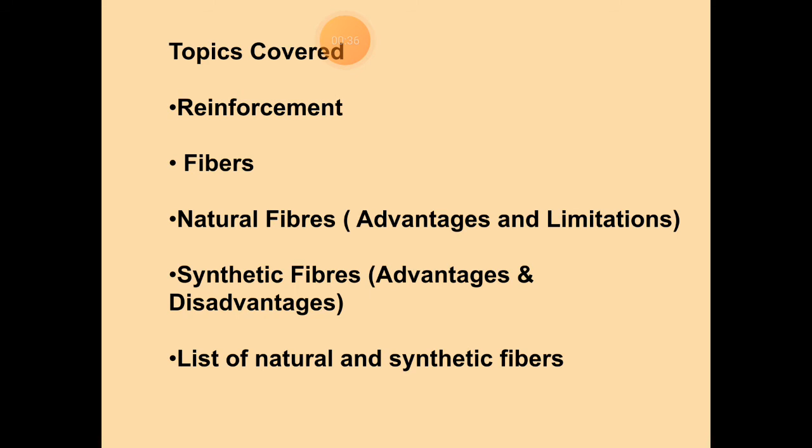Now turn to reinforcement. In materials science, reinforcement is a constituent of composite materials which increases the composite stiffness and tensile strength. Reinforcement materials usually add rigidity and greatly impede crack propagation. In particular, they enhance the mechanical properties of the matrix and in most cases are harder, stronger, stiffer than the matrix.

Reinforcing constituents in composites, as the word indicates, provide the strength that makes a composite what it is, but they also serve certain additional purposes of heat resistance or conduction, resistance to corrosion, and provide rigidity. Generally, reinforcement is used to withstand maximum load and serve the desirable properties. Reinforcement can be made to perform all or one of these functions as per the requirements.

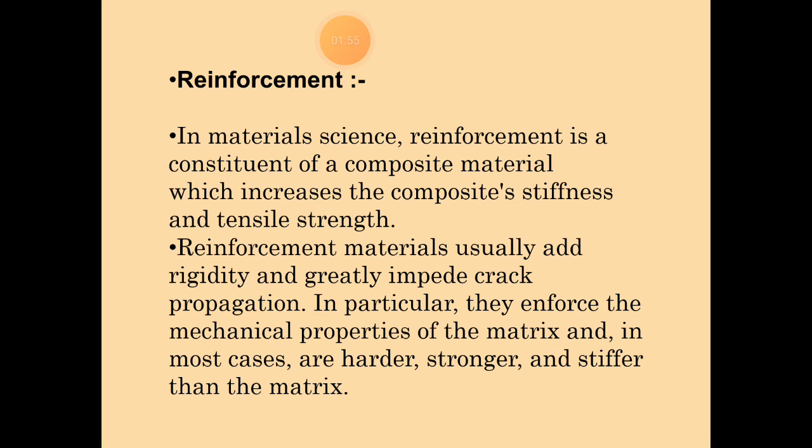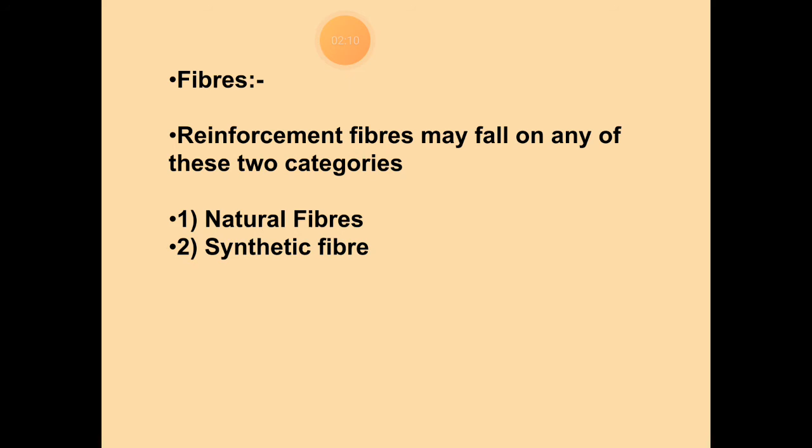Now, next is the fibers. Reinforcement fibers may be categorized into two types. One is the natural fibers, another is the synthetic fibers. Now, natural fibers. Natural fibers are the fibers that are obtained from plant, animal, or mineral sources. Some examples are cotton, silk, wool, etc.

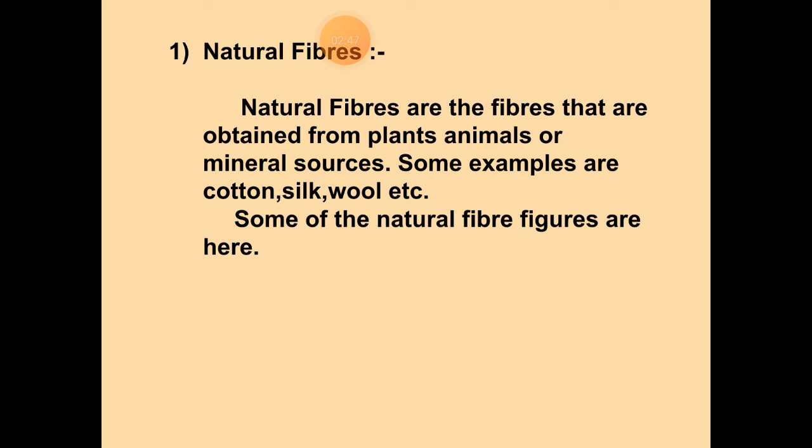Some of the natural fibers are shown here. In the natural fibers, various fibers like cotton, jute, plants are considered. See the figure. Figure shows luffa, palm, jute, banana, rice husk, kenaf, chicken feathers, cotton, coir, sisal, flax, abaca, hemp, and ramie.

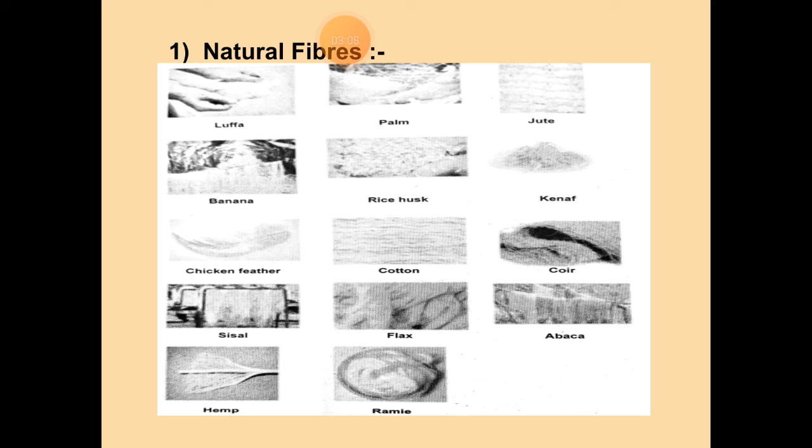Now turn to the various advantages of the natural fibers. They are renewable resources, with lower production cost. These fibers have low production cost compared to others. Then good specific mechanical properties, lower density of composites, reduced energy consumption during manufacturing, meaning saved energy. Then biodegradability, eco-friendly materials, lower risk to human health. These are the various advantages of the natural fiber.

Now, the limitations of the natural fibers are lower thermal resistance, then dimensional instability, restricted processing temperatures, inhomogeneous structures of the fibers, then negative consequences of water absorption, then susceptibility to microbial attack and rotting.

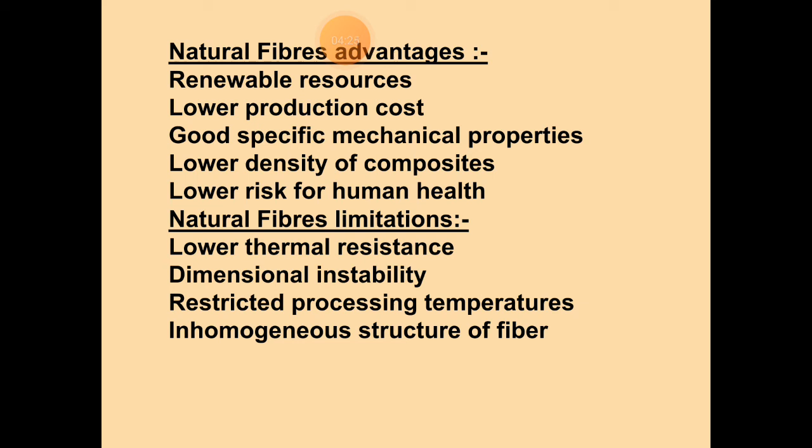Now turn to the second type, which is synthetic fibers. These fibers are man-made. Most of these are made from raw materials. If the raw material is petroleum, then they are called petrochemicals. They consist of small units, or a polymer made from many repeating units known as monomers. They include nylon, acrylics, polyethylene or polypropylene. Millions of tons of these fibers are produced all over the world each year.

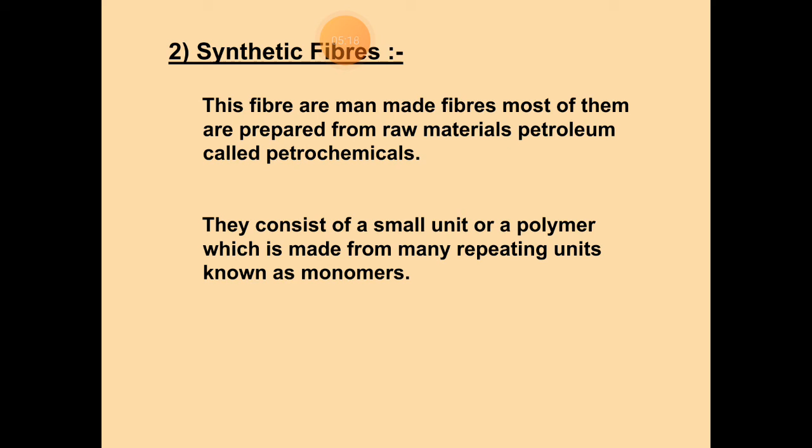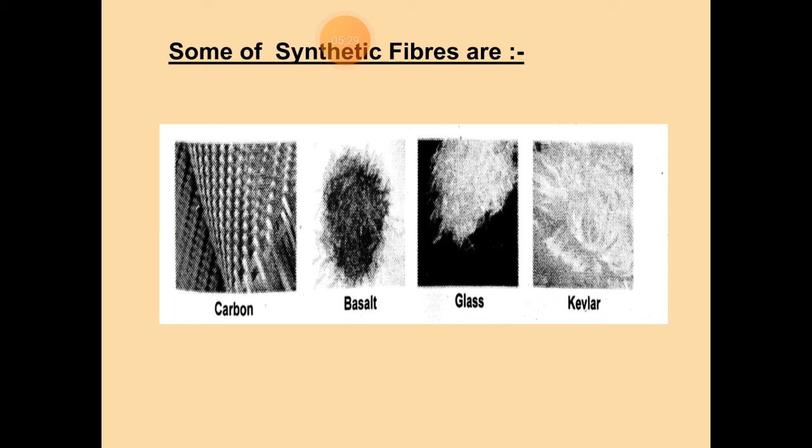Some synthetic fibers are shown in the figure. First one is carbon, second is basalt, glass, Kevlar. These are the various synthetic fiber figures. Advantages of these fibers: they are stretchable, waterproof, moisture resistant, non-biodegradable, long lasting, and readily pick up various dyes.

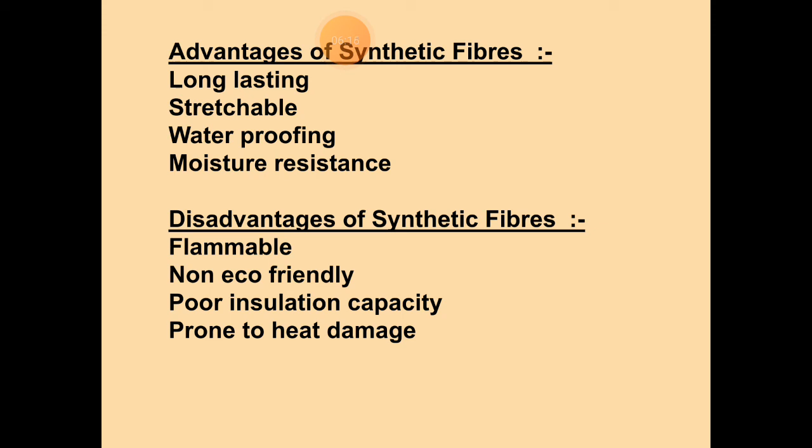Next are the disadvantages of the synthetic fibers. One is they are flammable; it is easily flammable. Then next is non-eco-friendly, poor insulation capacity, prone to heat damage. These are the disadvantages of synthetic fiber.

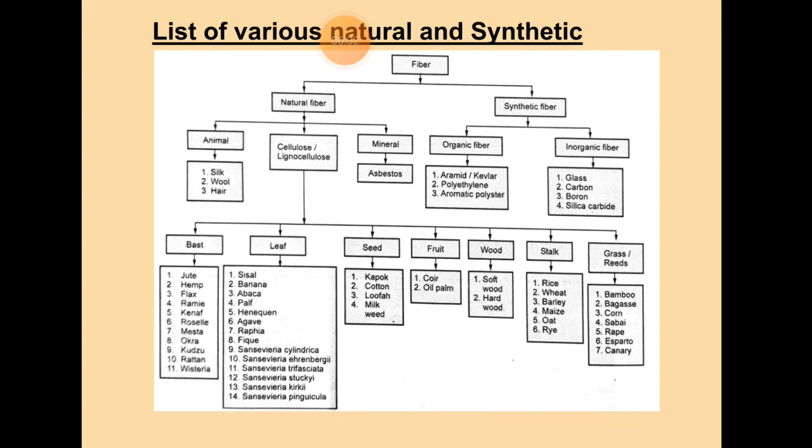Now turn to the list of various natural and synthetic fibers. The chart shows the various types. Fibers are of two types, synthetic and natural. Natural fibers include animal, cellulose and minerals. Animal has three types: silk, wool, hair. Cellulose has various types: bast, leaf, seed, fruit, wood, stalk, grass or reeds.

Minerals are asbestos. In cellulose, in bast, there are jute, hemp, flax; leaf: sisal, banana, abaca; then seeds: cotton, milkweed; fruits: oil palm, coir; wood: softwood, hardwood; stalk: rice, wheat, barley, oat, rye. Then in grass: bamboo, bagasse, corn, sabai, rape, canary.

Next one is synthetic fiber. There are two types, organic fibers and inorganic fibers. The organic is further classified into aromatic polyamide, polyethylene, aromatic polyester; inorganic is glass, carbon, boron, silicon carbide.

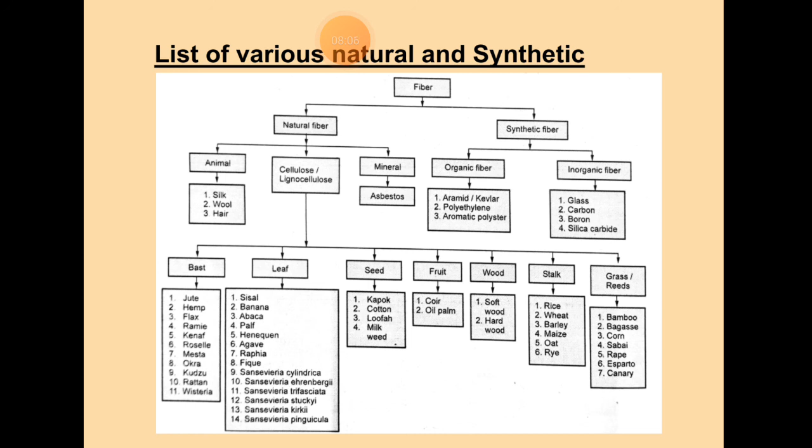In this way, in this topic, we discussed the various fibers, natural, synthetic, then reinforcement, which is very important in the composite material study.